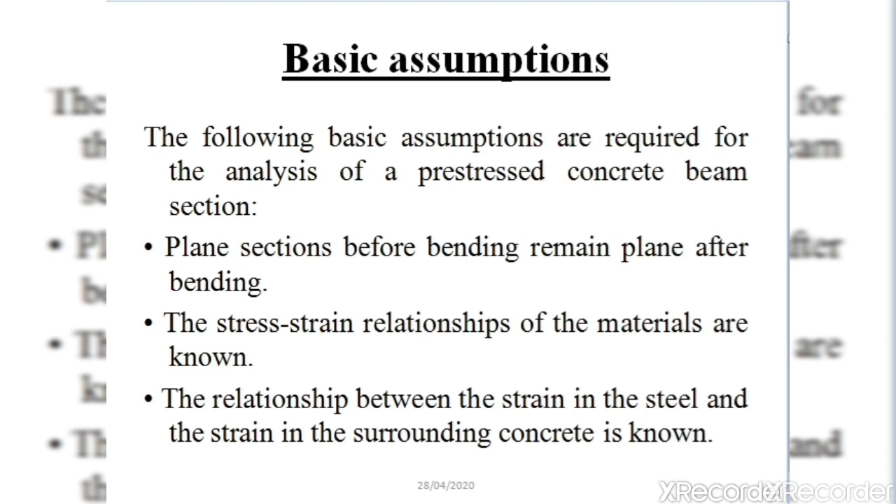First is fracture of steel in tension. When the percentage of steel provided in a section is low, the concrete in the tension zone cracks, leading to fracture of the steel in tension. This can be reduced by providing a certain percentage of steel in the total gross area. As per the code provision, the minimum longitudinal reinforcement needed is 0.2% of the cross-section area in post-tension members. When high-strength deformed reinforcement steel is used, the minimum steel percentage reduces to 0.15% of the cross-section area. This failure is sudden, it fails without giving any warning. Hence, this failure can be called a dangerous failure.

The second type of failure is failure of an under-reinforced section. If the cross section is provided with an amount of steel greater than required, the failure is characterized by excess elongation of steel followed by crushing of concrete. Here the member approaches failure because of gradual reduction of the compression zone, which develops near the top edge or sometimes at the soffit of a beam, and this failure progresses towards the compression zone. Because of this, cracks are progressive in nature and increase with time, hence it gives enough warning before it fails. So the first type of failure is a sudden failure, and the second type gives enough warning before it fails.

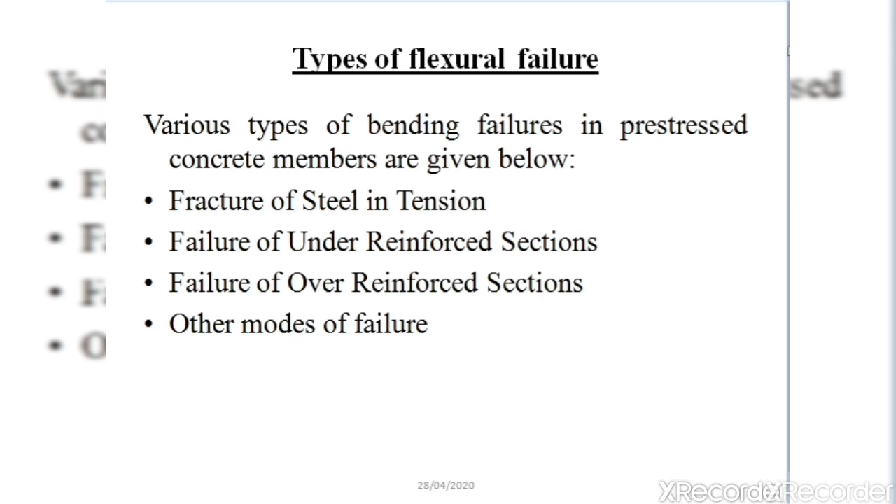Now let us see the ultimate flexural strength of a section. We can calculate the ultimate flexural strength of a section in two cases: one along the flange and the second along the web. If it is a rectangular section, then the ultimate strength will lie in the web, or it can be considered as the flange because it is a rectangular section.

If it is a T section or an I section, then we need to check where the neutral axis lies and what the ultimate flexural strength of the section will be. First we shall consider the ultimate flexural strength in which the neutral axis lies within the flange. This case is suitable for a rectangular section and a flanged section. Flanged section means a T section or an I section. In T and I sections we will have a neutral axis within the flange. For this case, let us derive the ultimate flexural strength.

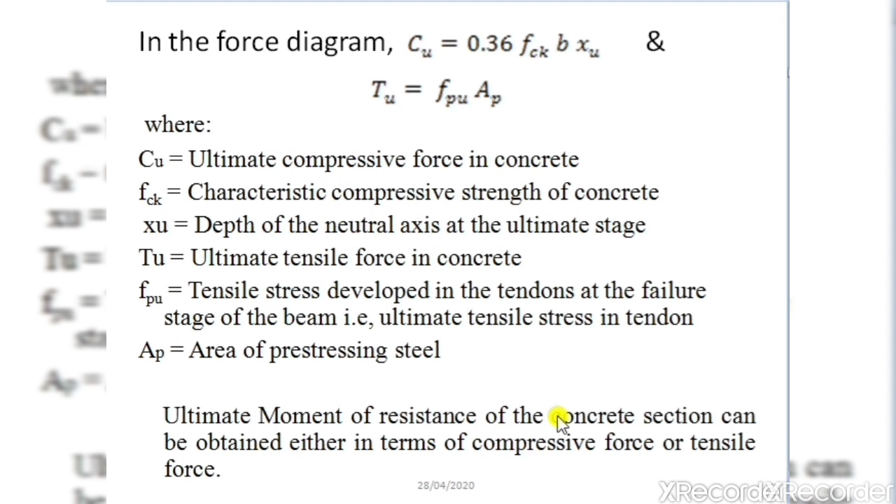So in general, ultimate moment of resistance is equal to ultimate force into lever arm. As I already told you, we can calculate the moment of resistance in terms of compressive force as well as in terms of tensile force. So first we shall calculate the ultimate moment of resistance in terms of compressive force. That is, ultimate moment of resistance in terms of compressive force is equal to ultimate force into lever arm.

So what is the ultimate compressive force in this section? The ultimate compressive force in the section is 0.36 fck into b into xu. So this is the ultimate or maximum compressive force developed in the member. So this force is multiplied by the lever arm. The lever arm is d minus 0.42 xu. It is the distance which is measured from the CG of the tensioned steel. So that is the lever arm in this figure.

Therefore, ultimate moment of resistance in terms of compressive force is Mu equal to 0.36 fck b into xu. So this is the maximum compressive force, or ultimate compressive force, into d minus 0.42 xu. So d minus 0.42 xu is the lever arm distance, or it is the distance which is measured from the CG of the tension steel.

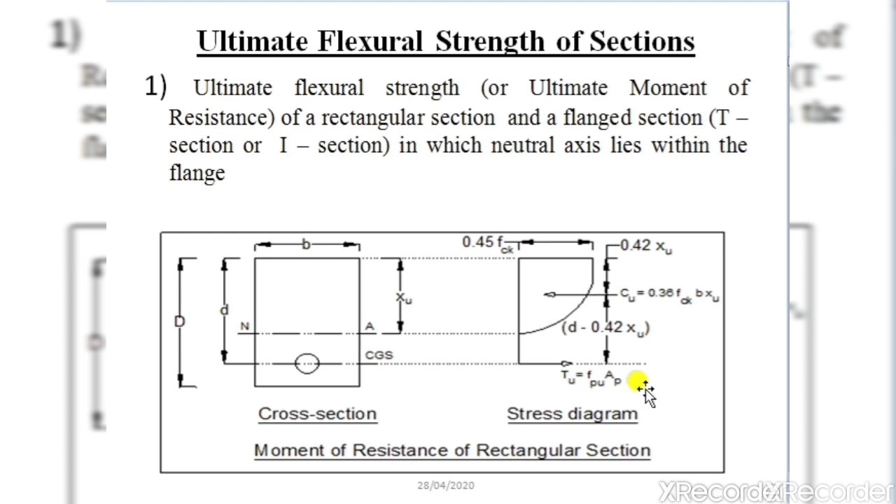Then, what about ultimate moment of resistance in terms of tensile steel? In this figure, for a rectangular section, what is the ultimate tensile force developed in the member? The ultimate tensile force developed in the member is Tu equal to fpu into Ap. So this is the ultimate force developed in the rectangular section. So moment of resistance in terms of tensile force is equal to ultimate tensile force multiplied by lever arm. Ultimate tensile force is fpu into Ap, and into lever arm. Lever arm is d minus 0.42 into xu.

So as per IS 1343 1980, the ultimate moment of resistance of a rectangular section or a T section in which the neutral axis lies within the flange may be obtained as Mu equal to fpu into Ap into d minus 0.42 xu. For the analysis of prestressed concrete member in flexure, we are going to use a code book, that is IS 1343 1980. This is the code book which is required for the analysis of a prestressed concrete beam under flexure.

Here we are going to use table 11 and table 12, where Mu is the ultimate moment of resistance of the section. So Mu is the maximum moment that a section can resist. fpu is the ultimate tensile stress in the steel. Ap is the cross-sectional area of prestressing tendons, and xu is the depth of neutral axis from the top fiber. So as per IS 1343 1980, we can calculate the maximum moment of resistance for a rectangular section or a T section when the neutral axis lies in the flange using this equation: Mu equal to fpu into Ap into d minus 0.42 xu.

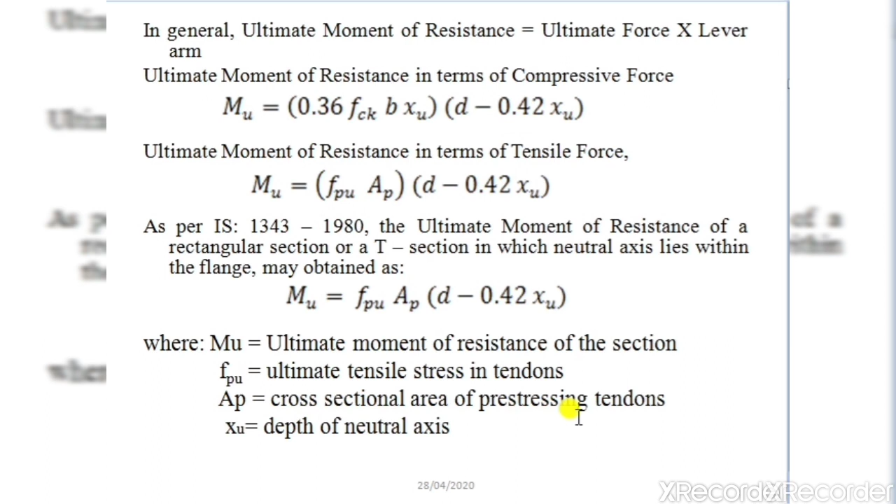The values of fpu and xu are determined using table 11 and table 12 of IS 1343 1980 by using a ratio called the prestressing reinforcement index, Wp, which is given by Wp equal to Ap into fp divided by b d into fck. xu is the neutral axis depth, and fpu is the ultimate tensile stress in the cable. So the value of xu can be determined using tables 11 and 12 of IS 1343. Table 11 of IS 1343 1980 gives the values of fpu and xu for pre-tensioned members and bonded post-tensioned members. Table 12 gives the values for unbonded post-tensioned members.

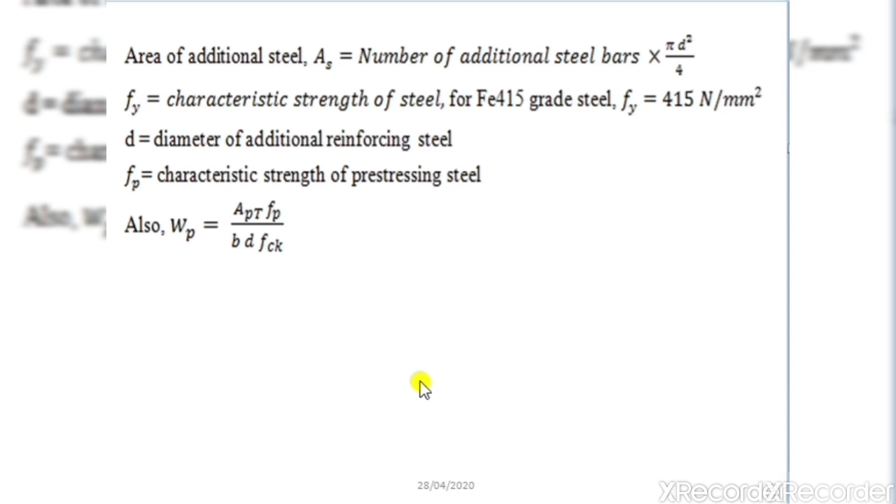In table 11, the values of fpu and xu are respectively given as fpu by 0.87 fp and xu by d. So this is table 11 of IS 1343 1980. Here, we calculate the ratio Ap fp divided by b d fck, and corresponding to the obtained value of this ratio, we get the value of fpu divided by 0.87 fp for pre-tensioned members and post-tensioned members with effective bonding. If I get the value of the ratio fpu by 0.87 fp, then I can calculate fpu.

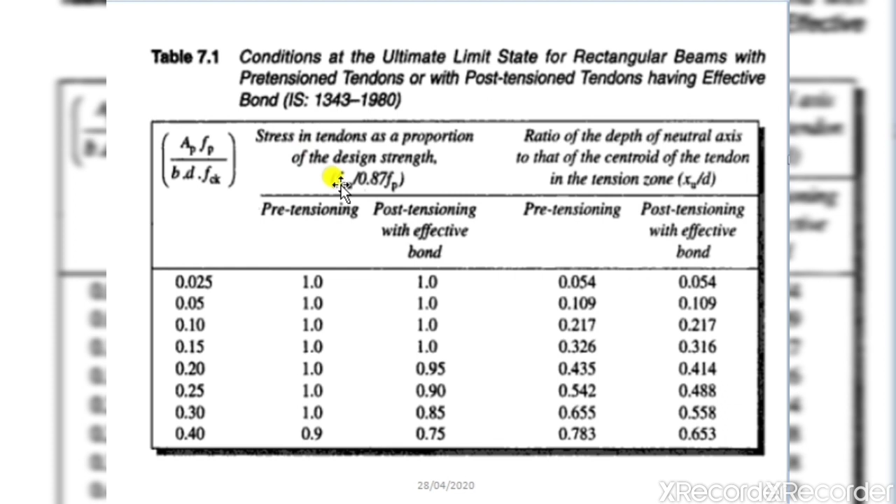Similarly, for the ratio xu by d, if I get the value of xu by d, then I can calculate xu. So xu by d is equal to this value, and d is the effective depth. The effective depth multiplied by this value gives xu. So using this table for pre-tensioned members and post-tensioned members with bonding, we can calculate fpu and xu. That is given here in the table. The values of fpu and xu are respectively given as fpu by 0.87 fp and xu by d. Similarly, in table 12, the values of fpu and xu are respectively given as fpu by fp and xu by d.

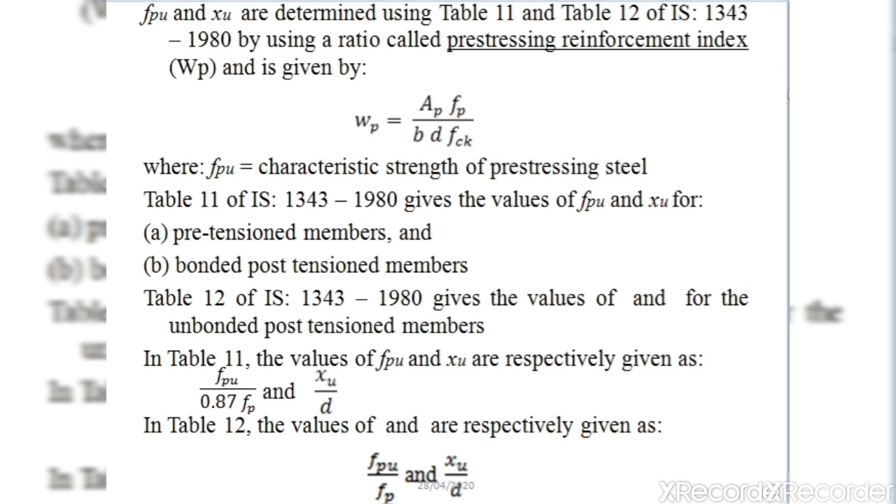In the previous case, we calculated the ultimate moment of resistance for a rectangular section. Now let us see the second case. What will be the maximum moment of resistance, or ultimate moment of resistance, for a flanged section, that is a T section or an I section, when the neutral axis lies in the web portion?

Here let us consider an I section member whose overall depth is D, and let the width of the flange be BF and the depth of the flange be DF, and let BW be the thickness of the web. This T section can be split into two sections. One is a rectangular section and the second is two rectangular flange portions. I am going to consider this section as one section and these two portions of the flange as the other section. For a rectangular section the stress diagram will be a combination of a rectangle and a parabolic shape, and for these two portions this will be the stress diagram.

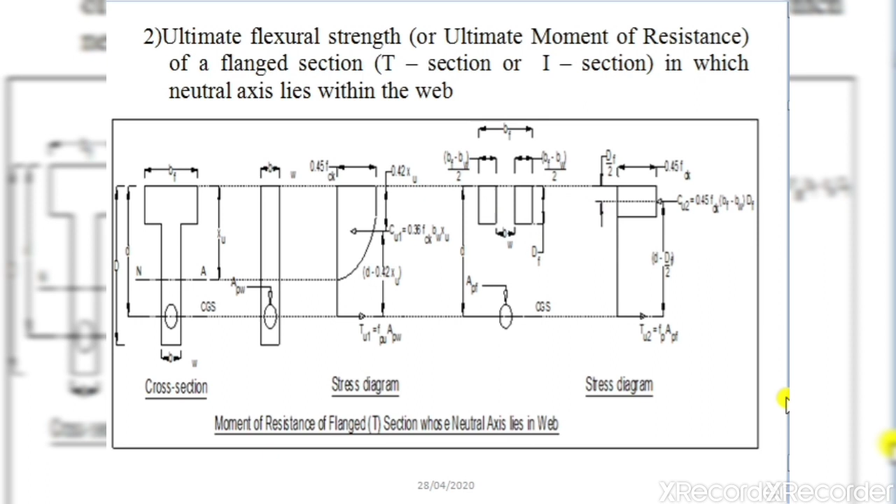Similarly, the ultimate moment of resistance in terms of tensile force will be tensile force multiplied by lever arm distance. So it is the tensile force fpu Apw into (d minus 0.42 xu). This is the moment of resistance developed for the web portion, and this is the moment of resistance developed for the outstanding flanged portion: 0.45 fck (bf minus bw) Df into (d minus 0.5 Df). This is the lever arm distance for the outstanding flanged portion, and d minus 0.42 xu is the lever arm distance for the web portion. That is what is multiplied here.

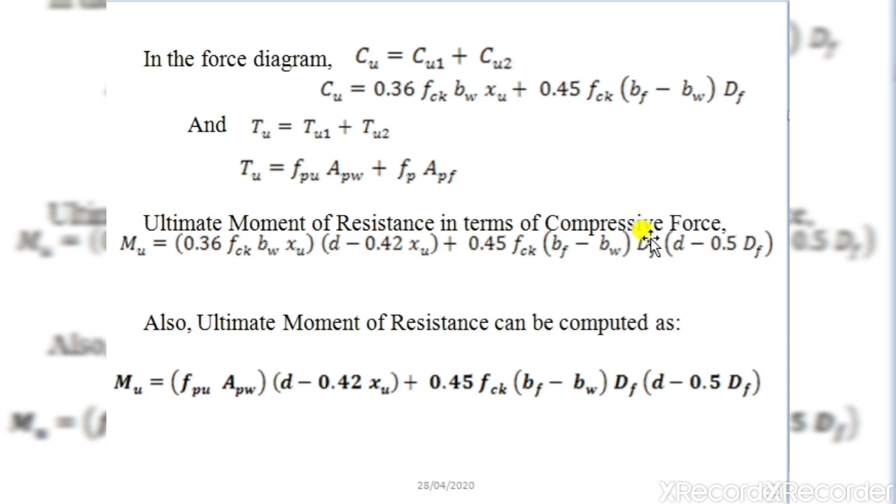So tensile force in the web portion into lever arm distance, plus tensile force in the flanged portion into lever arm distance of the flanged portion. Similarly here also, this is the compressive force in the web portion, and this is the lever arm distance for the web portion. This is the compressive force in the outstanding flanged portion, and this is the lever arm distance for the outstanding flanged portion,

where fpu is the ultimate tensile stress in the tendon, fp is the characteristic strength of prestressing steel, Apw is the cross-sectional area of prestressing steel for the web, and Apf is the cross-sectional area of prestressing steel for the flange. That is, Apf can be calculated using the equation 0.45 fck (bf minus bw) Df divided by fp. So using this equation we can calculate the cross-sectional area of prestressing steel provided in the flange. Therefore Ap is equal to Apw plus Apf, where Ap is the total steel present in the section including flange and web.

So bw is the breadth or width of the web or rib portion, Df is the depth of the flange, xu is the depth of the neutral axis. And here the prestressing reinforcement index is given by Wp equal to Apw into fp divided by bw d fck. So it is the same as the previous one.

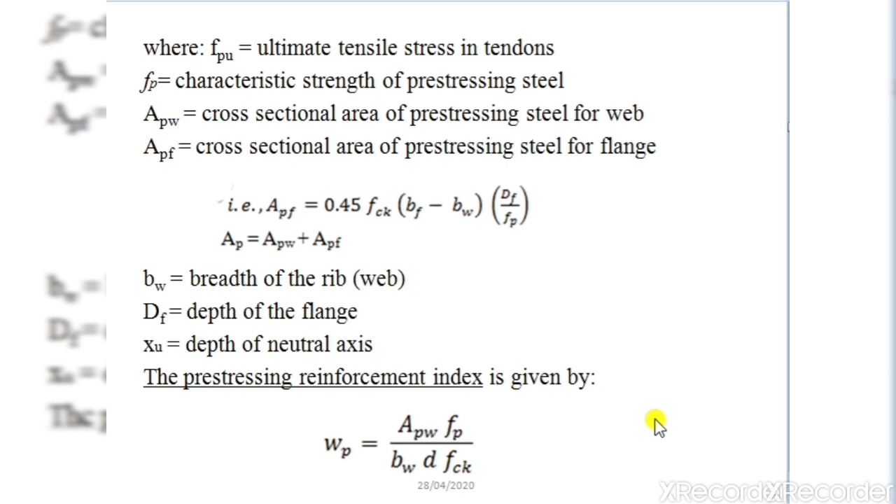So this is table number 11, from which we can get the values of fpu by 0.87 fp and the ratio xu by d for the reinforcement ratio, for post-tensioned members as well as for pre-tensioned members. And here it should be noted that we can get the values of fpu by 0.87 fp and xu by d for post-tension members only when the tendons are bonded. For unbonded tendons, we will refer to table 12. Table number 11 and table number 12 are available on page number 59 of IS 1343:1980.

So this is table number 12. Here it is given condition at ultimate limit state for post-tensioned rectangular beams having unbonded tendons. So if the member is a post-tensioned member and the tendons or cables used in the member are unbonded, then we need to refer to this table number 12, which is given on page number 59 of IS 1343/1980.

So here we will not only calculate the reinforcement ratio, but in addition to this we will also calculate the ratio of L by D, where L is the effective span and D is the effective depth. So effective depth, it is small d. So this should be a small d. There is a mistake in the code book. So it is effective depth small d. So we will calculate the reinforcement ratio. Then we will calculate the ratio for L by D.

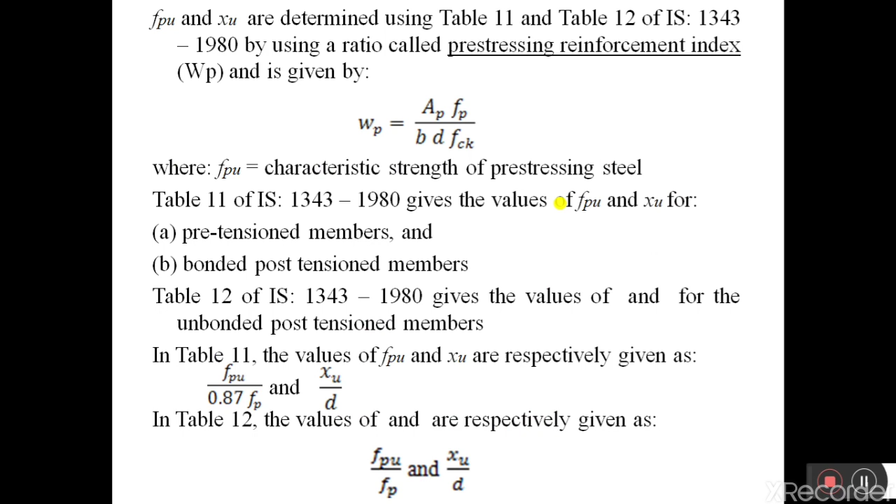And now we shall try to solve some numericals on the ultimate flexural strength of a section. So before coming to the examples, once again I am going to tell you which are the formulas you need to remember. So these are the formulas you need to remember.

If it is a rectangular section, or if the neutral axis lies in the flange, if the section is a T section or an I section and the neutral axis of the section is lying within the flange. See here the condition is given when the neutral axis lies within the flange, and for the rectangular section we should use this formula. We can use either this formula and this formula, or we can use this formula. So if we use these two formulas, we can calculate the ultimate moment of resistance in compressive force and ultimate moment of resistance in tensile force. Whereas if we use this formula, we can calculate the net ultimate moment of resistance in the section. So we can also use these two formulas to calculate the moment of resistance, or else we can use only this formula. So both are correct.

Suppose when the neutral axis lies in the web, then what is the formula? So when the neutral axis lies in the web, we should use these two formulas, this one and this one. So this one is the formula to calculate ultimate moment of resistance in terms of compressive force, and this is the formula to calculate ultimate moment of resistance in terms of tensile force. So these two formulas you should remember. If you remember these formulas, then it is very easy to analyze and calculate the maximum moment that a beam can take in this mode.

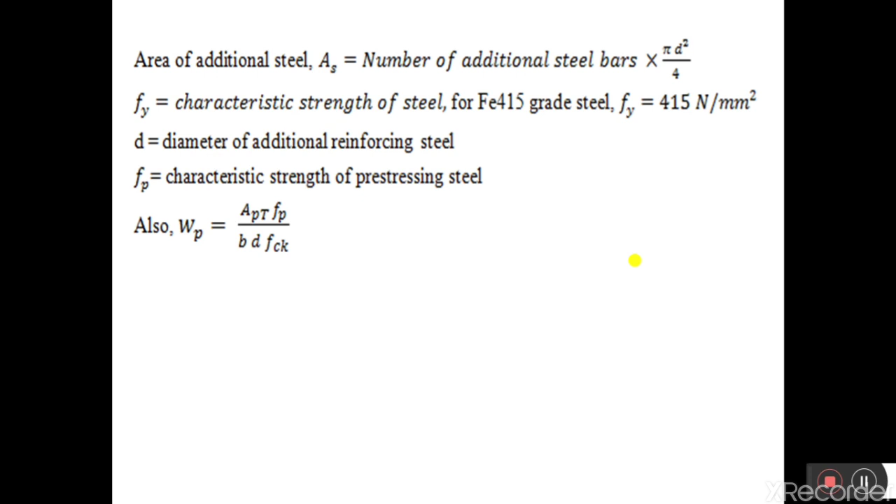Okay, now let us consider the first example. A pre-tensioned prestressed concrete beam having a rectangular section 150 mm wide and 350 mm deep has an effective cover of 50 mm. If fck is equal to 40 N/mm², fp is equal to 1600 N/mm², and the area of prestressing steel is 461 mm², calculate the ultimate flexural strength of the section using IS 1343 code provision.

So here it is a rectangular beam which is pre-tensioned. The cross section of the beam is 150 mm by 350 mm, and in the question it is given that the effective cover for the beam is 50 mm, the compressive strength of concrete, that is fck, is equal to 40 N/mm², fp of steel is 1600 N/mm², and the total area of steel is 461 mm². For this condition, we should calculate the ultimate flexural strength of the section as per IS 1343 code provision. So first let us consider the given data.

So fck, fp, Ap, b and D, these are the given data. Here it is a rectangular beam and the member is a pre-tensioned member. When the member is pre-tensioned, we should refer to Table 11 of IS 1343-1980. So what is given in Table 11? In Table 11, the values of fpu by 0.87 fp are given. Also, the value of the ratio xu by d is given. So just remember the formula and let us calculate the data that is required to be substituted in the formula.

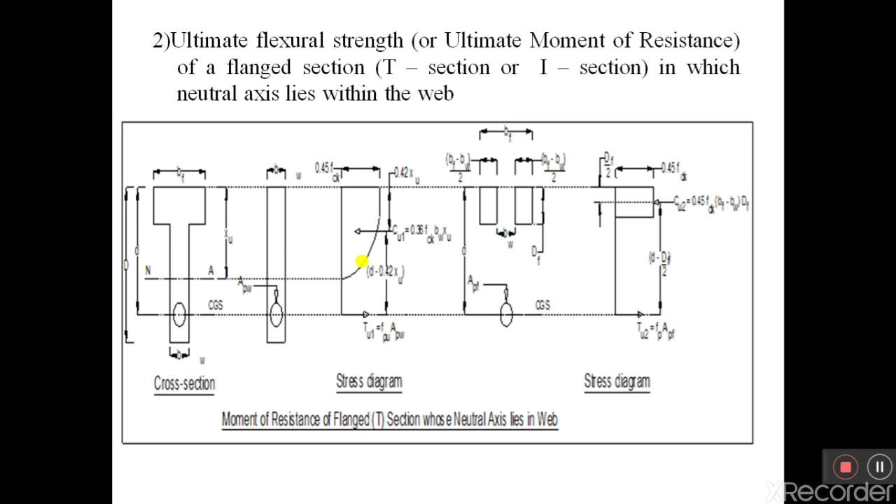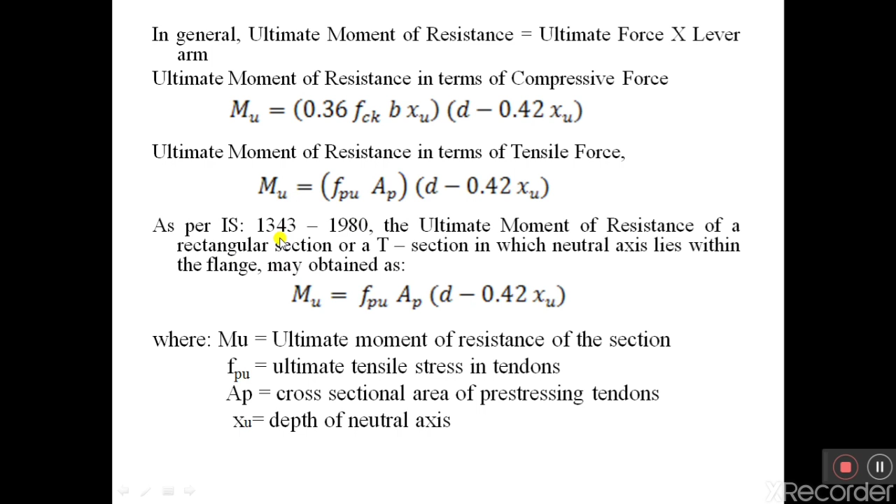Therefore, moment of resistance. As I told you before, for a rectangular section and for a T section or I section, when the neutral axis lies in the flange, we can use either these two formulas or else we can only use this formula. So both are correct. Here I will use this formula as per the recommendation of IS 1343-1980.

So it is a rectangular section. So I am going to use the formula to calculate the moment of resistance. Mu is equal to fpu into Ap into (d minus 0.42 xu). So this is the formula as per IS 1343-1980 to calculate the ultimate moment of resistance of a rectangular prestressed concrete beam. The value of fpu is known, that is we have calculated in the previous step. Ap is known, area of steel, it is given. So d, effective depth: the overall depth is 350 mm and the thickness of cover is 50 mm.

So overall depth minus thickness of cover will give the effective depth, that is 350 minus 50 is equal to 300 mm, and 0.42 into XU, which we have calculated in the previous step, that is 234.9. Therefore the ultimate moment of resistance is equal to 116 into 10 to the power of 6 Newton millimeter, or 116 kilonewton meter. So this is the ultimate moment of resistance of a rectangular PSC beam. The rectangular prestressed concrete beam can take up a maximum moment of 116 kilonewton meter.

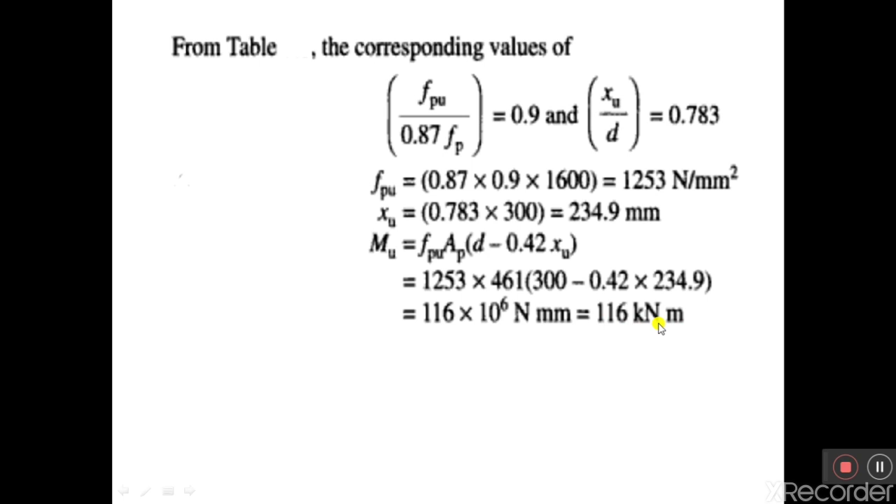Now let us move on to the next example. A pre-tensioned T section has a flange which is 300 mm wide and 200 mm thick. The rib is 150 mm wide by 350 mm deep. The effective depth of the cross section is 500 mm. Given AP is equal to 200 mm square, FCK is equal to 50 Newton per mm square, and FP is equal to 1600 Newton per mm square. Estimate the ultimate moment capacity of the T section using Indian Standard Code regulations.

So here it is a flanged section, that is, the section is a T section, and the cross section of the flange is 300 mm by 200 mm, and the cross section of the web or rib is 150 mm by 350 mm. And here it is directly given that the effective depth of the cross section is 500 millimeter. So first let us consider the given data. In the question, FCK, the compressive strength of concrete, is given, it is 50 Newton per mm square. FP is given as 1600 Newton per mm square. Area of steel is given, it is 200 millimeter square. B is given, it is 300 mm, and the effective depth is equal to 500 mm.

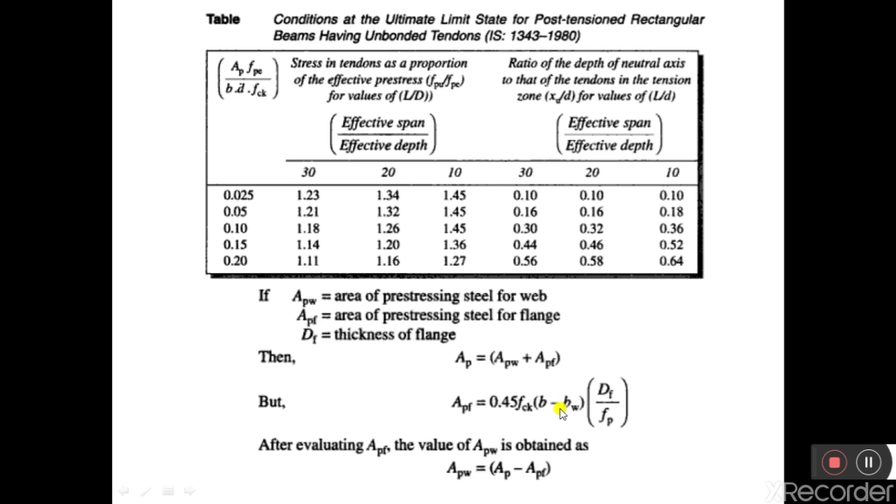So in the formula to calculate the reinforcement ratio, we have APW. What is APW? APW is the total area of steel present in the web. We know that the total area of steel in the T section is equal to the total steel in the web plus the total steel in the flange. But to calculate the reinforcement ratio, we need the area of steel in the web, that is APW, and we know that total steel is the summation of these two. And we have a formula to calculate the amount of steel provided in the flange, APF.

So the area of steel present in the flange, APF, is equal to 0.45 FCK into (B minus BW) into DF by FP. All these values are known. 0.45 into FCK, which is given, is 40 Newton per mm square. B is known, that is 1200 mm, minus BW, the width of web, which is given as 300 mm. DF, the thickness or depth of flange, is given as 150 mm. Here it is divided by FP, which is given in the question: the tensile strength of steel is 1600 Newton per mm square. So substitute that, and we will get the total area of steel present in the flange.

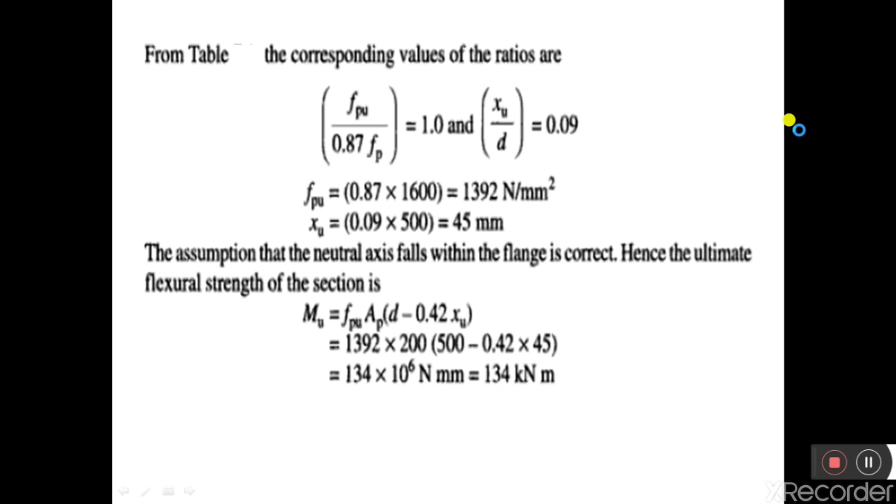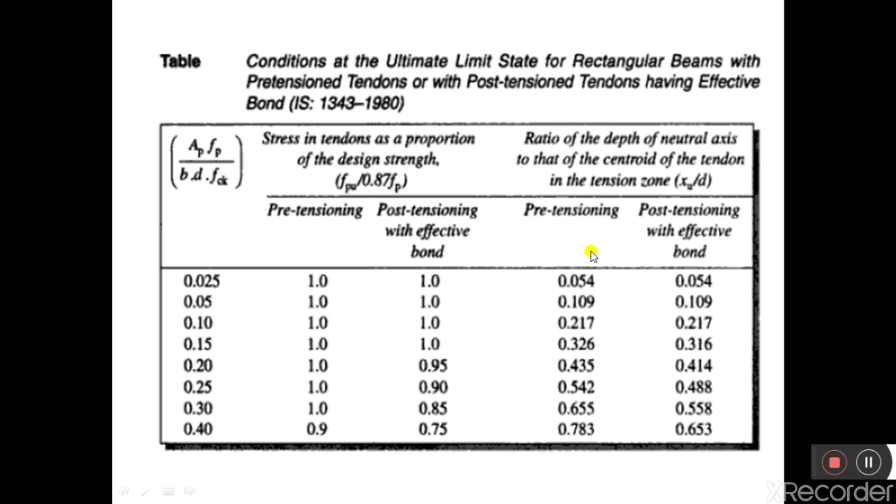here and here, then the ratio of FPU by 0.87 FP will be 1. Therefore, the value of FP is known. So substitute the value of FP. FPU is equal to 0.87 into 1600. So the ultimate stress in the cable is equal to 1392 Newton per millimeter square.

Similarly, for 0.265, the ratio XU by D is equal to 0.56. So the value of D is known, that is the effective depth of the member, or the effective depth of a flanged section. It is 1600 millimeter. Substitute the value of D in this. Therefore, XU is equal to 0.56 into 1600 millimeter, which gives 896 millimeter.

So here what I had assumed is that the neutral axis lies in the web. So the neutral axis is lying at a distance of 896 millimeter. I already told you, the neutral axis is measured from the top fiber. The overall depth of the section is 1650, that is 1500 plus 150, it is 1650, and the neutral axis is lying at a depth of 896 millimeter. So when we measure the depth of the neutral axis from the top fiber of a T section, it is lying somewhere here at the midpoint.

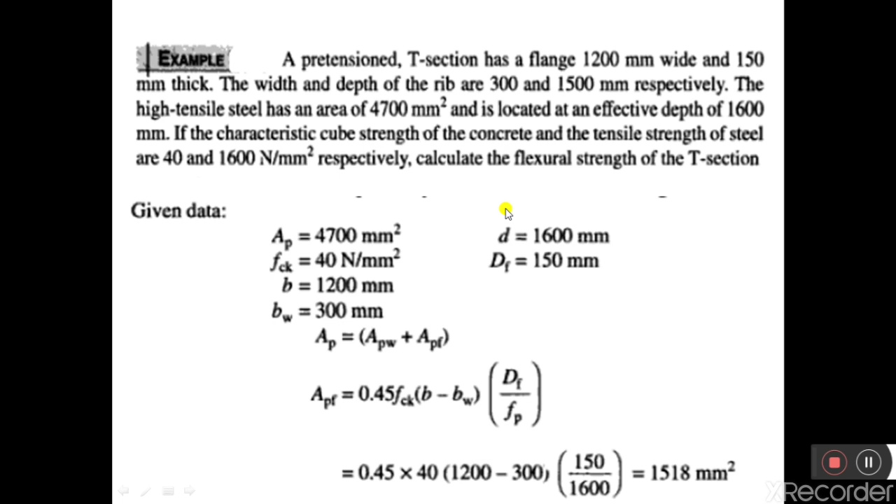If it was less than 150 mm, then again we would have to calculate the reinforcement ratio by assuming the neutral axis lies in the flange, and then again calculate what FPU is and what XU is. But our assumption is right, as XU is greater than 150 millimeter, that is, XU is greater than the thickness of the flange. That shows that the neutral axis is out of the flange. Therefore, the last step is to calculate the ultimate moment of resistance.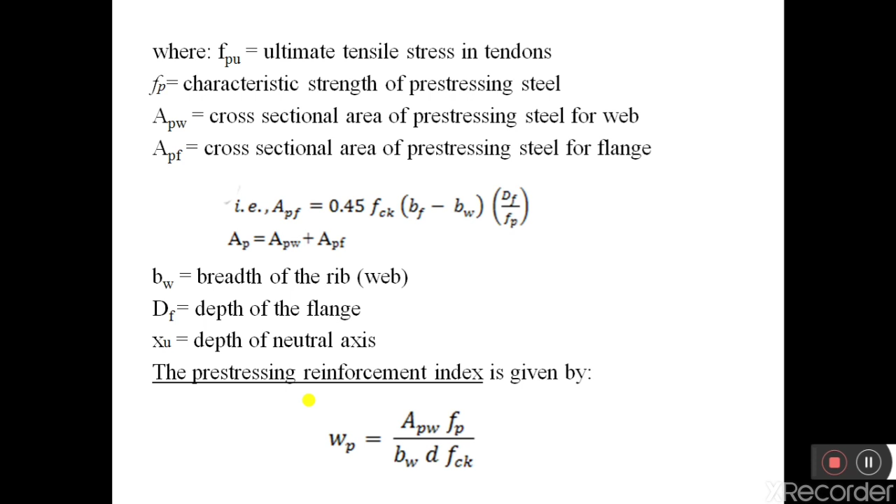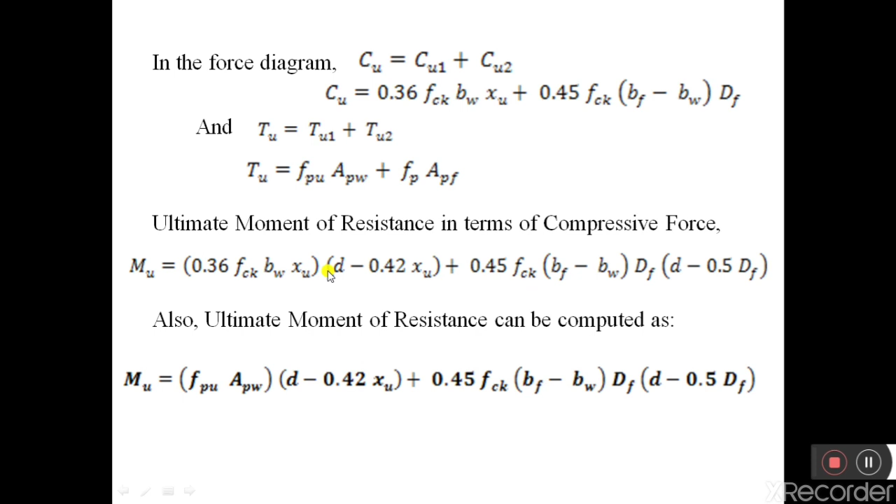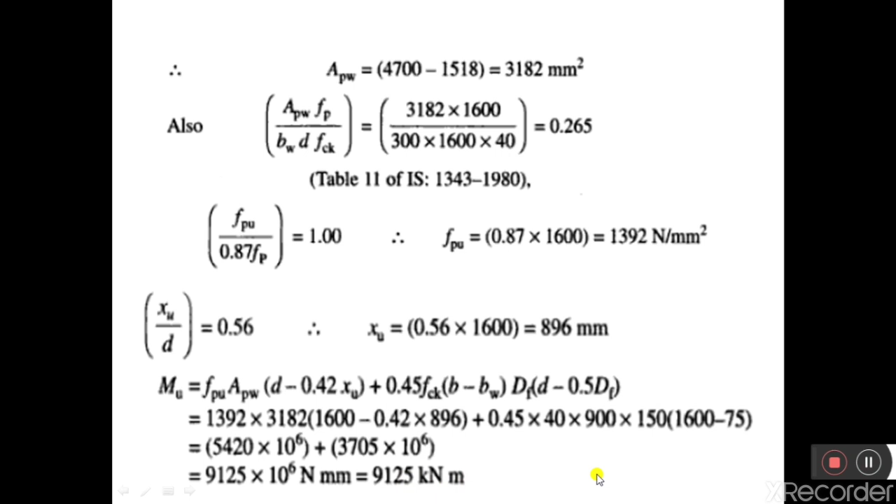Similarly, we can also calculate the moment of resistance in terms of tensile force. For that we should use this equation. If we use this equation, then we can calculate the ultimate moment of resistance of a T section under tensile force. So we have calculated the ultimate moment of resistance in terms of tensile force. Therefore, if a beam is subjected to a moment of more than 9125 kilonewton meter, then the beam starts failing, or the beam starts cracking, or it will undergo failure.